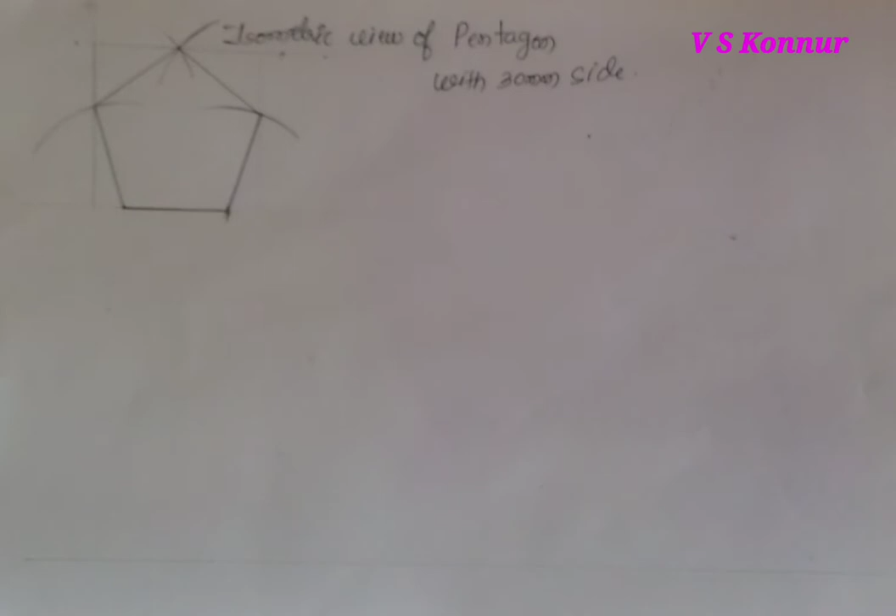So, isometric projection of a pentagon with 30 mm side. First, to draw the isometric projection of the pentagon, we have to draw the pentagon as usual with 30 mm side. First we have to draw this with 30 mm side, and then we should make the box.

We should make the box of the pentagon by considering the edge. It should be extended on either side, and also from this point it should be extended on either side, and the same will be transferred here, and it is also extended on either side. Then the same length, whatever you have taken here parallel to this, we have to transfer at this place also, the last end point. This is the first part we have to do.

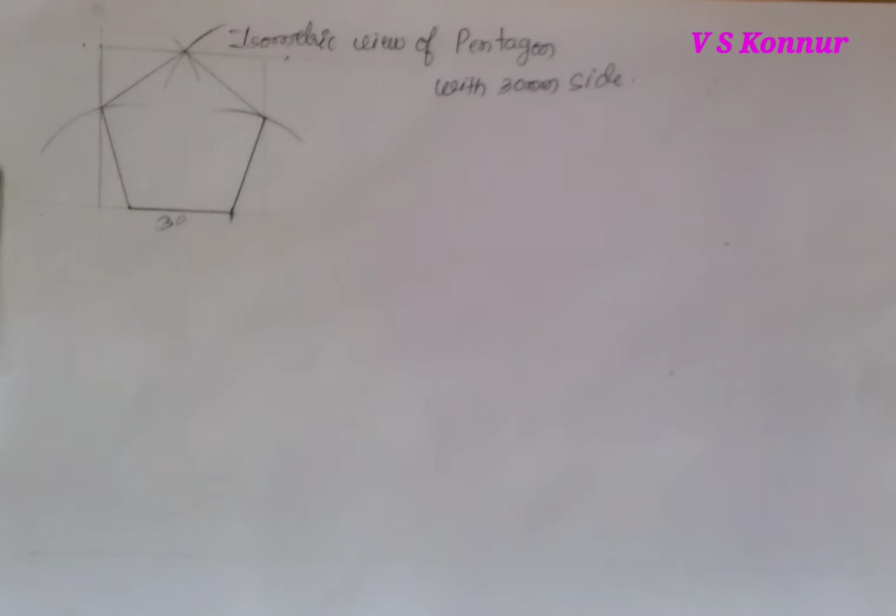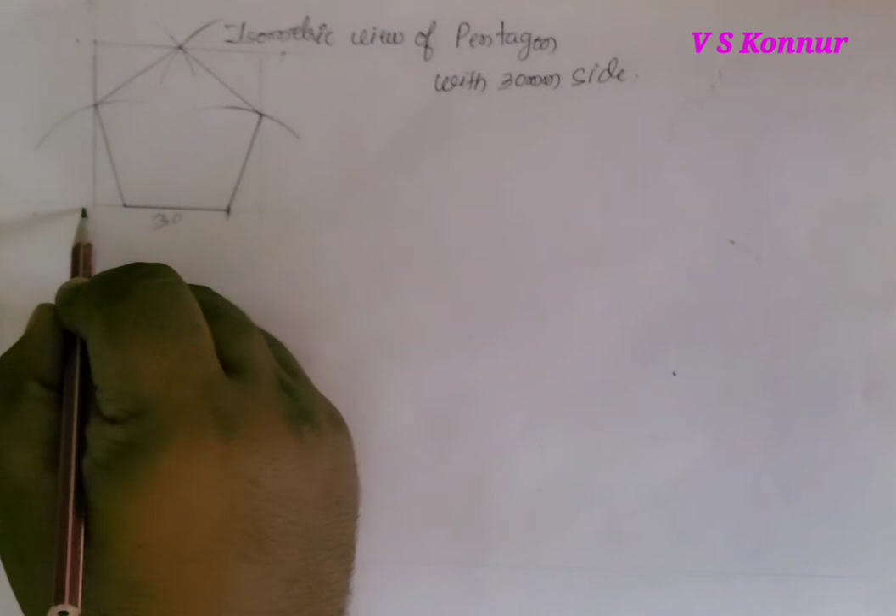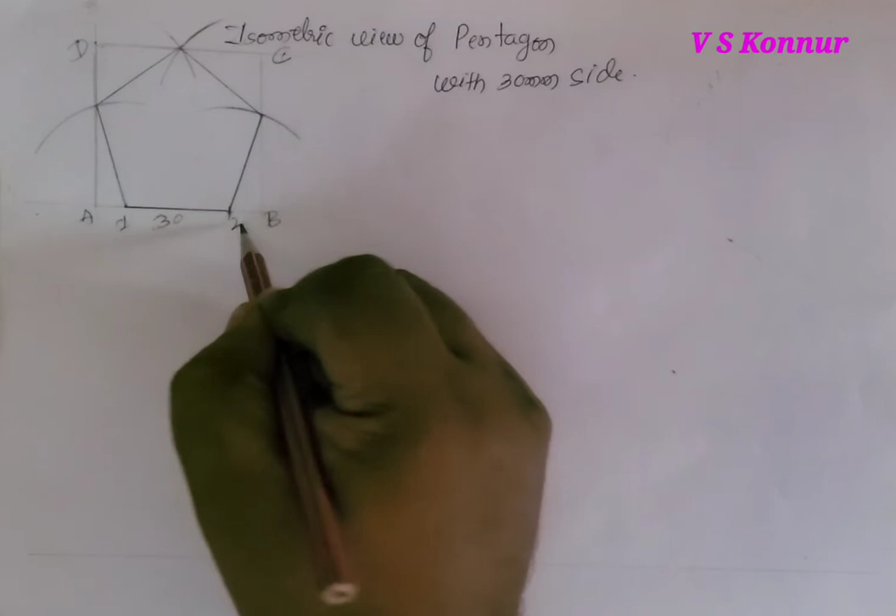Normally we have to draw the pentagon. After drawing the pentagon, we have to make the box by considering the bottom edge corners. So for that I will name this corner A, this corner B, this corner C, this corner D, and then we'll give 1, 2, 3, 4, 5. There will be 5 corners in the pentagon, so I will give them 5 names, 1 to 5. For the box I am giving A, B, C, D for convenience of constructing the pentagon in isometric view.

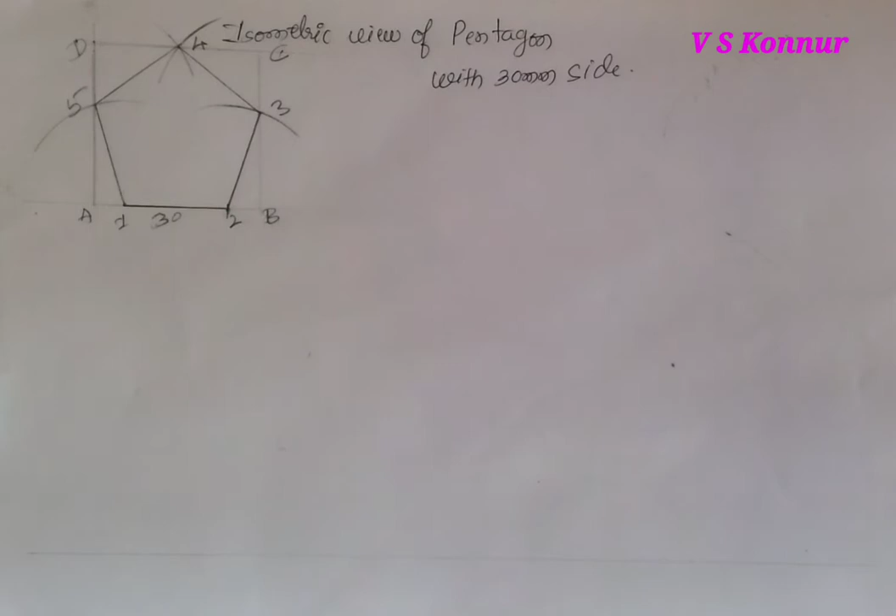Now you have to draw one horizontal line. After drawing the horizontal line, mark a point and then take 30 degrees on either side of this point on the horizontal line. Consider the horizontal as a reference after marking a point. So you have to take 30 degrees on either side.

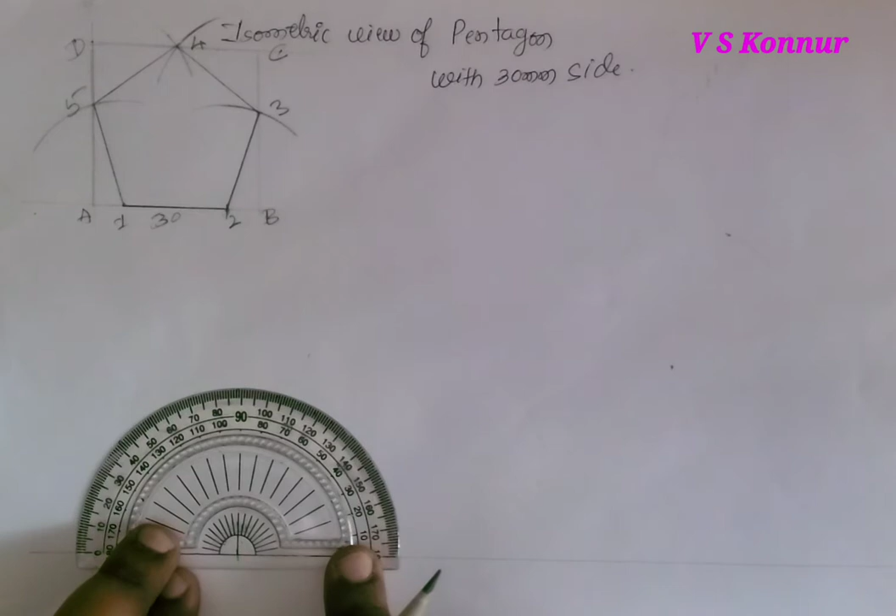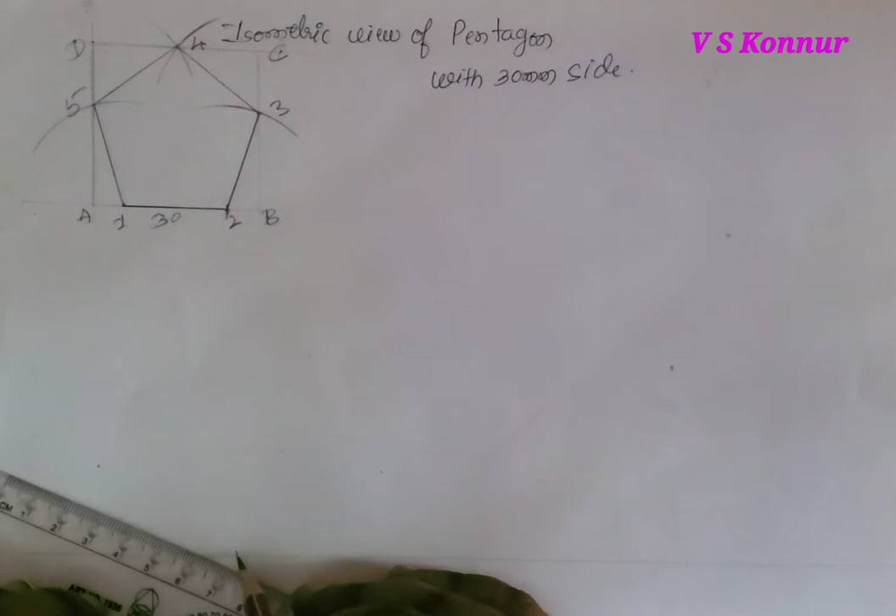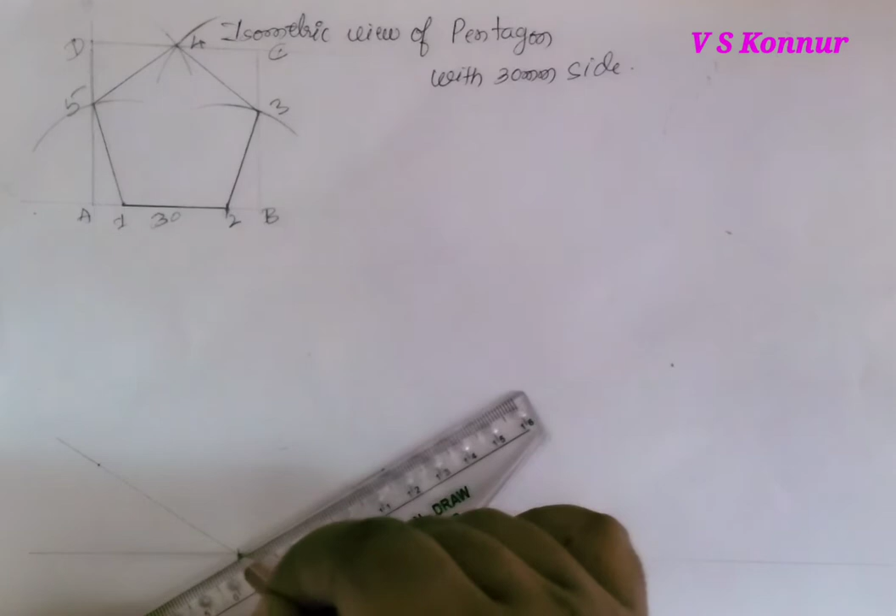After taking 30 degrees, just extend from this point for the 30 degree line. Don't make it with length. Just extend from this point at 30 degrees, and then from this point the other 30 degree line. After extending, now we will consider this point as A.

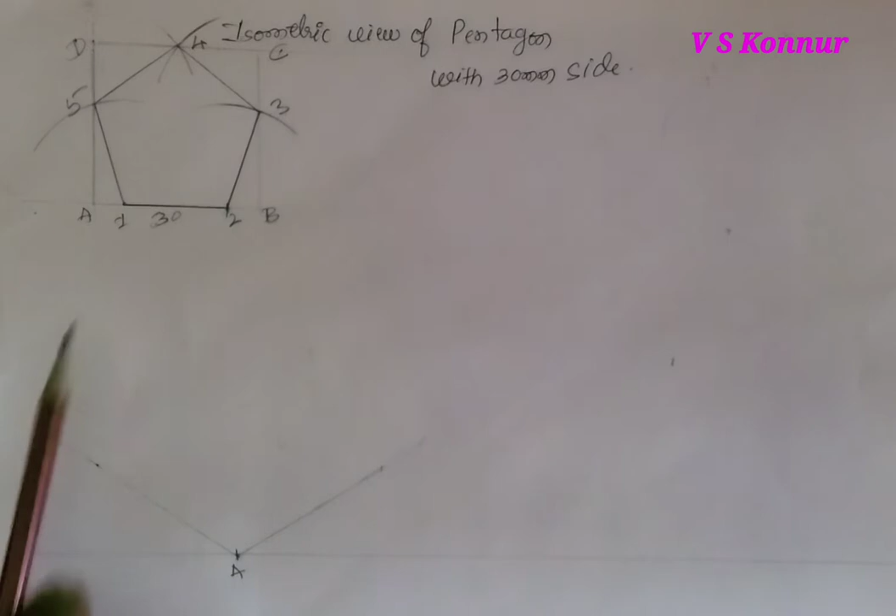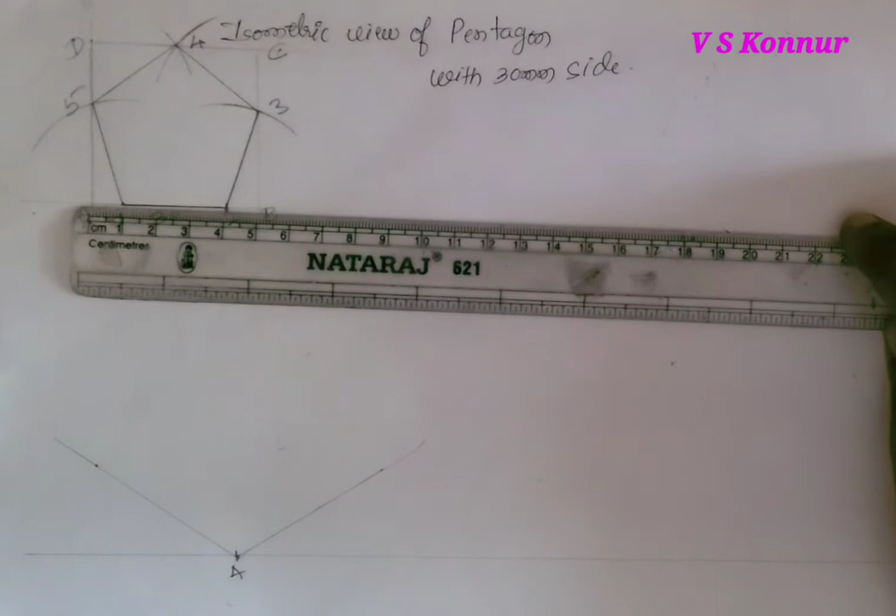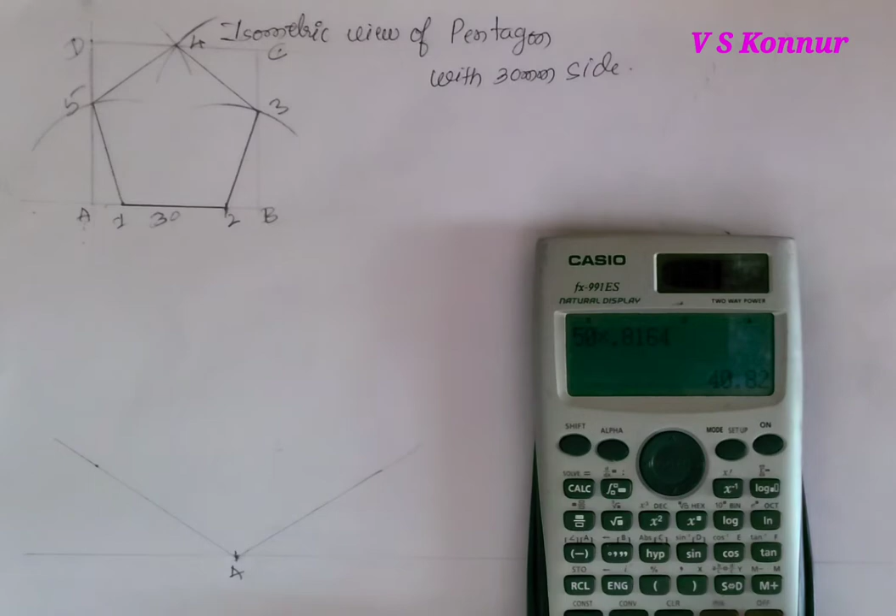This is nothing but the point I have marked here, and then I will take the distance by scale, the total distance of the box from A to B. So A to B is 50 millimeters. That 50 mm will be converted into isometric scale, that is 50 multiplied by 0.8164. We'll get 40.82, which is about 41. So AB is equal to 50 millimeters in original scale, converted into isometric scale by multiplying 50 by 0.8164.

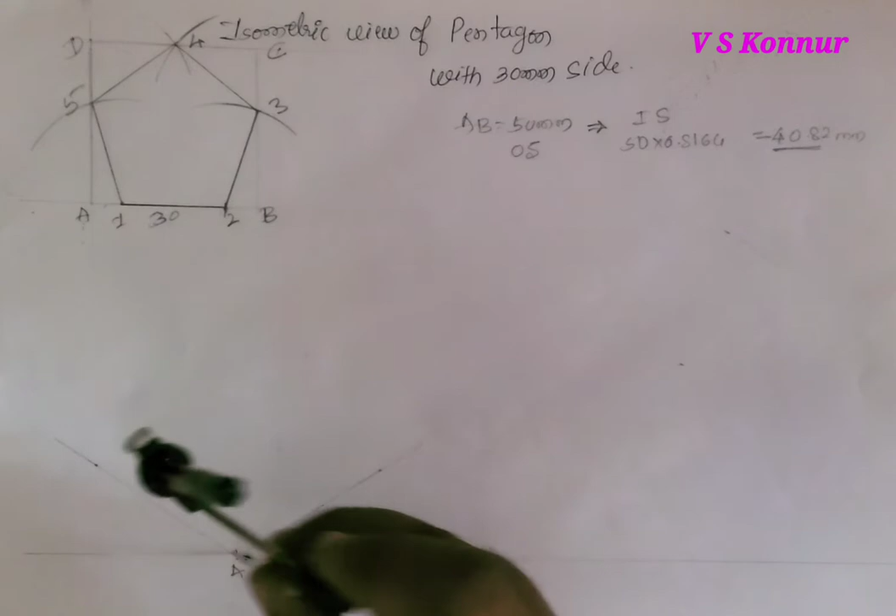So we will get 40.82 millimeters. This length will be taken with the divider and cut on this line. So we have to take 41 mm with the divider. From A you have to cut on the left side, 41.

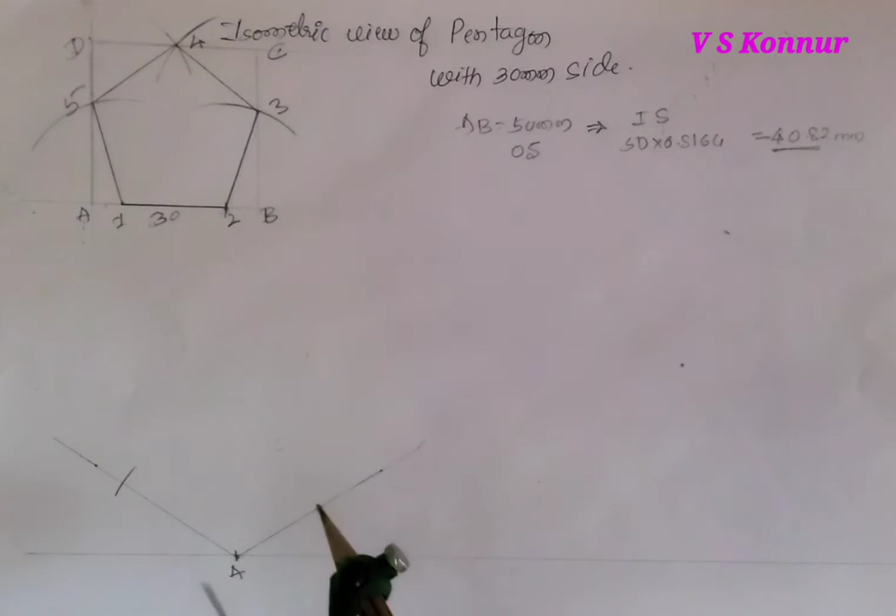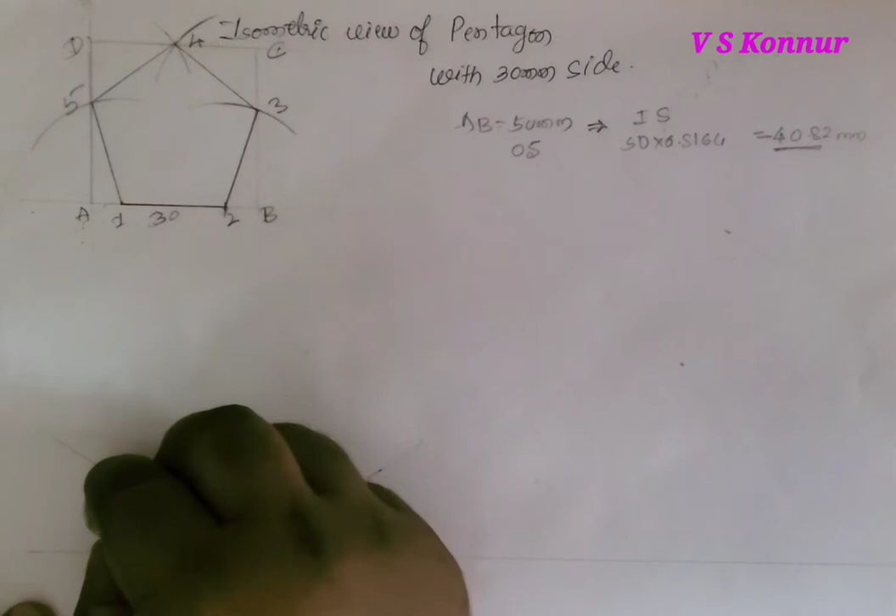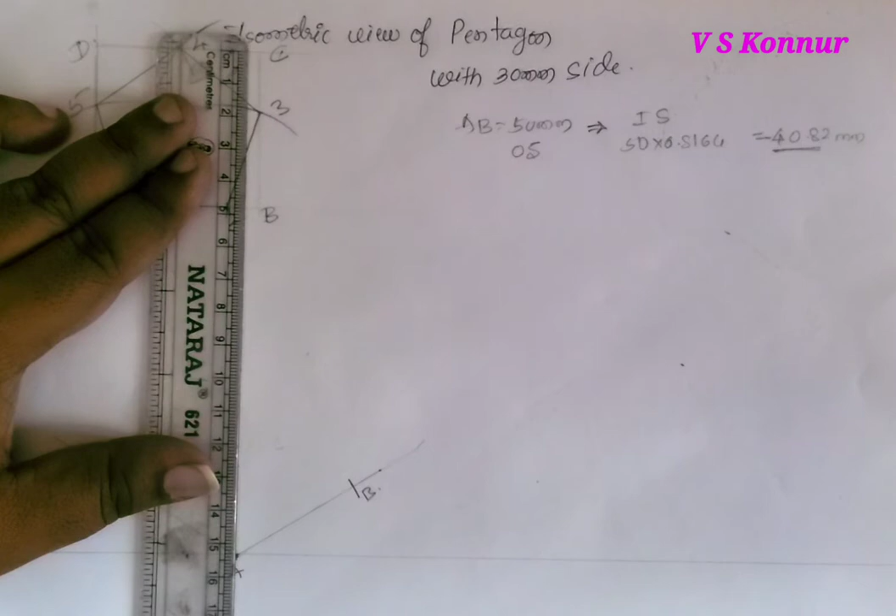And then the other side length you have to measure. A to B we have taken, so we'll cut on the right side. So this is the B point, not this point. Then we have to measure this length. It is around 48. You can measure on either side, you will get the same. It is around 48 millimeters.

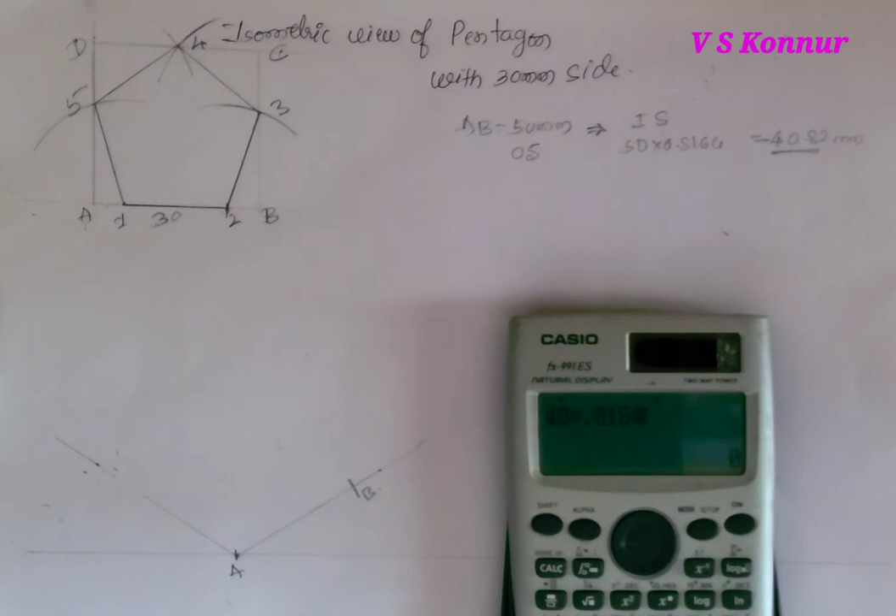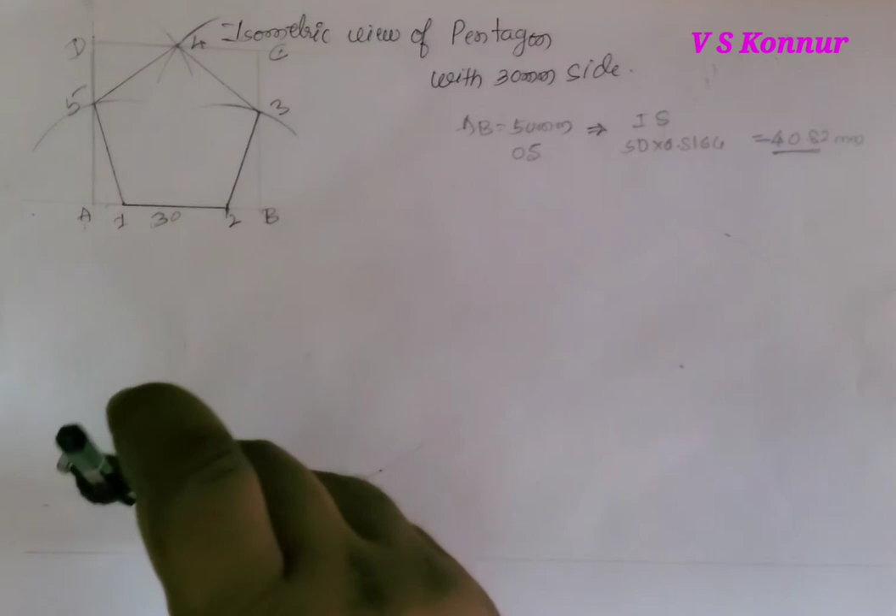So that 48 is multiplied by 0.8164, and we will get 39.18, around 39. From the scale we have to take 39, and then from A we have to cut on the left side. So here we will get the D point.

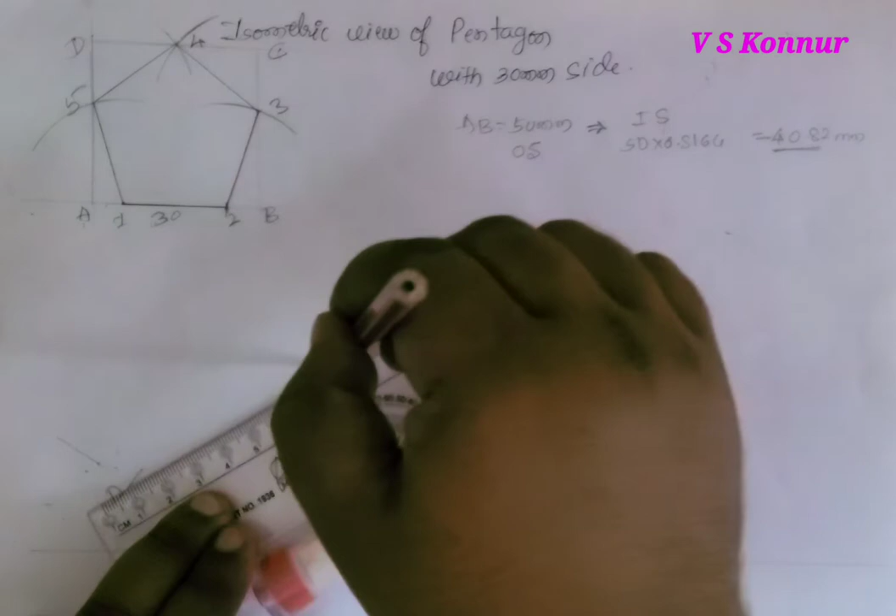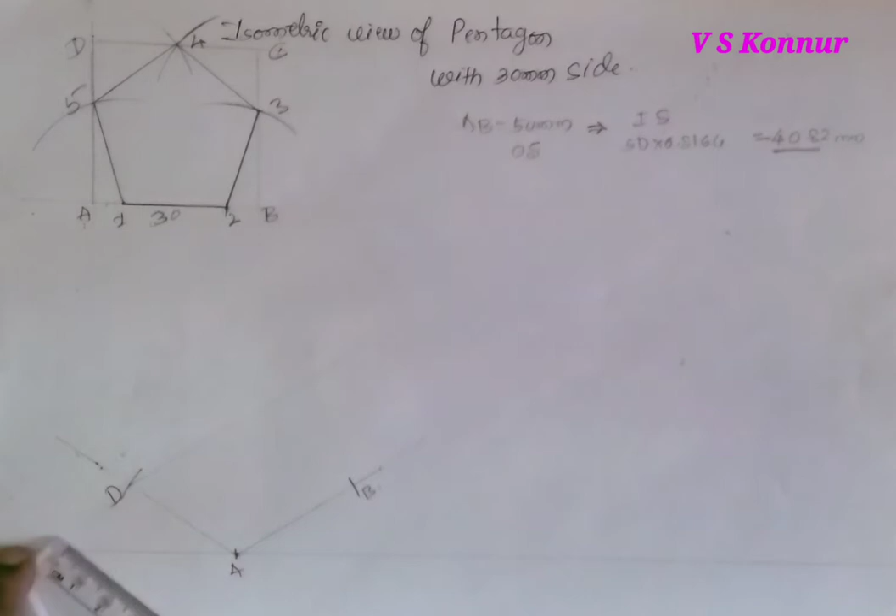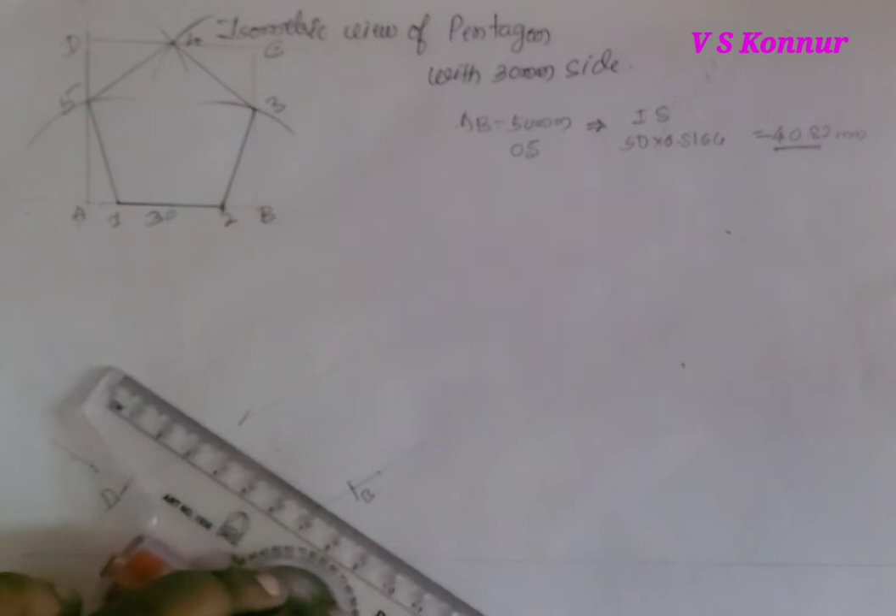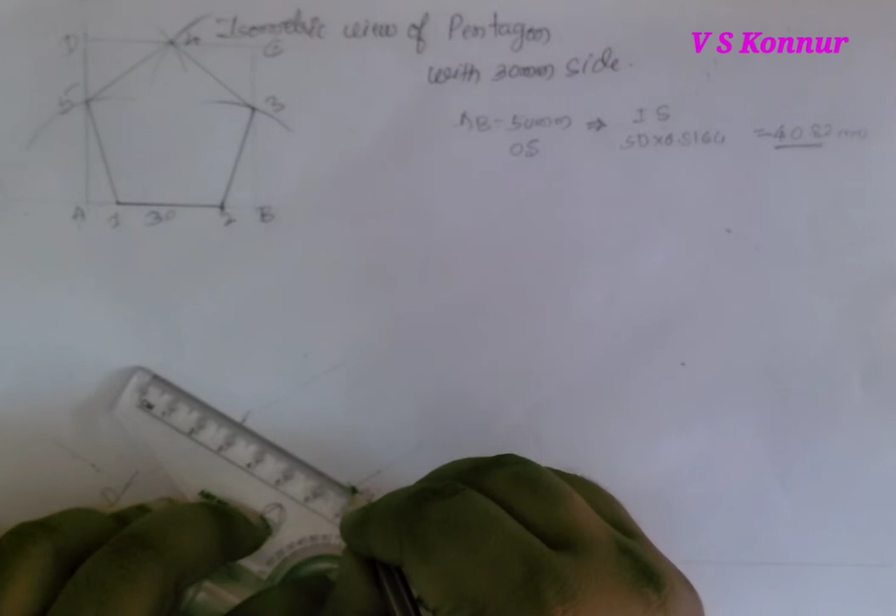The next part is very easy, no need of any cut. Just draw parallel to this line and move till the D intersection. Then from D, wherever the 30-degree line intersected, draw a parallel line. Once again, from this, extend till B, or you can cut it, since we already have the distance. From B also you can cut. Wherever it cuts, just join those 2 points. So we got all 4 points.

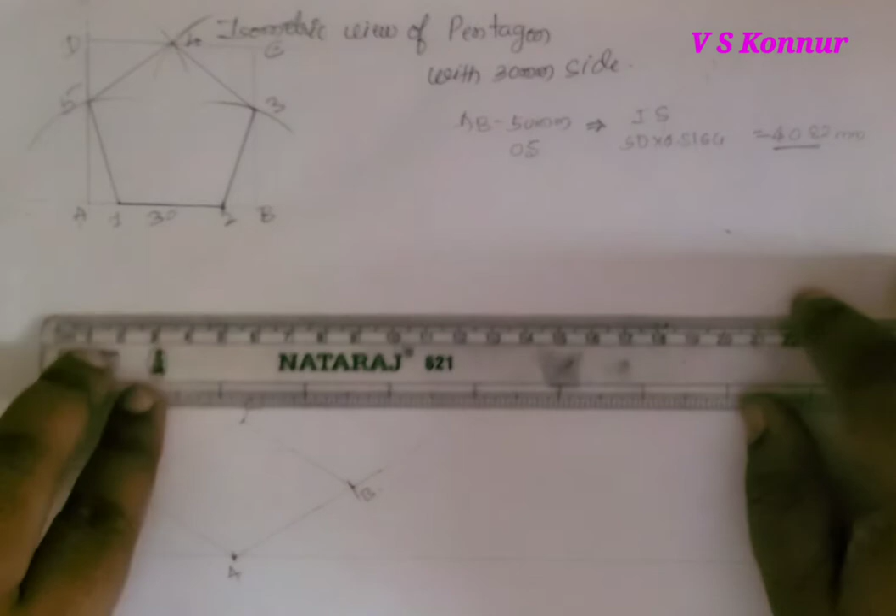Now the next part is to mark 1, 2, 3, 4, 5 on the box. First you can measure the distance from A to 1. A to 1 is 10 millimeters. From B to 2 is also 10 millimeters. So from A and B it is 10 mm. 10 mm converted into isometric scale will be 8.164, but we'll check: 10 into 0.8164 gives 8.164.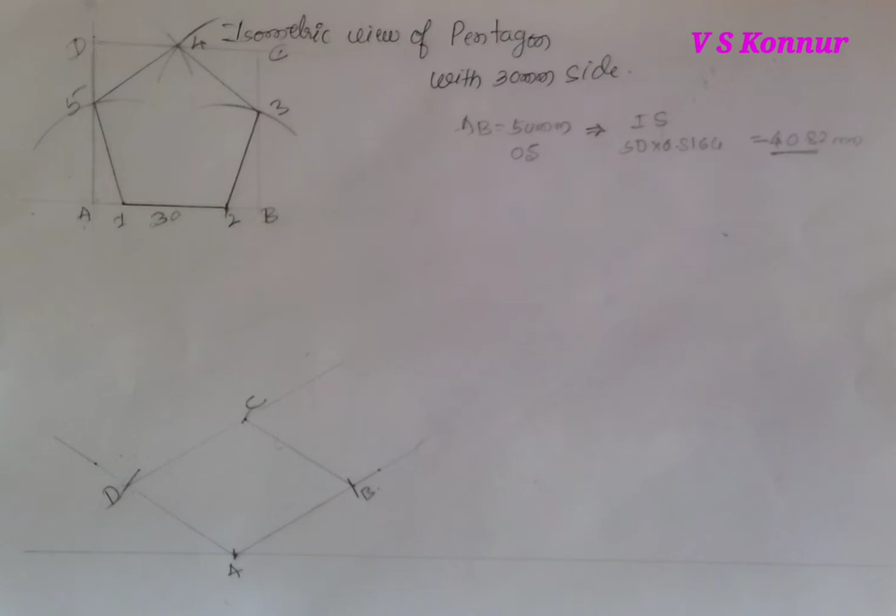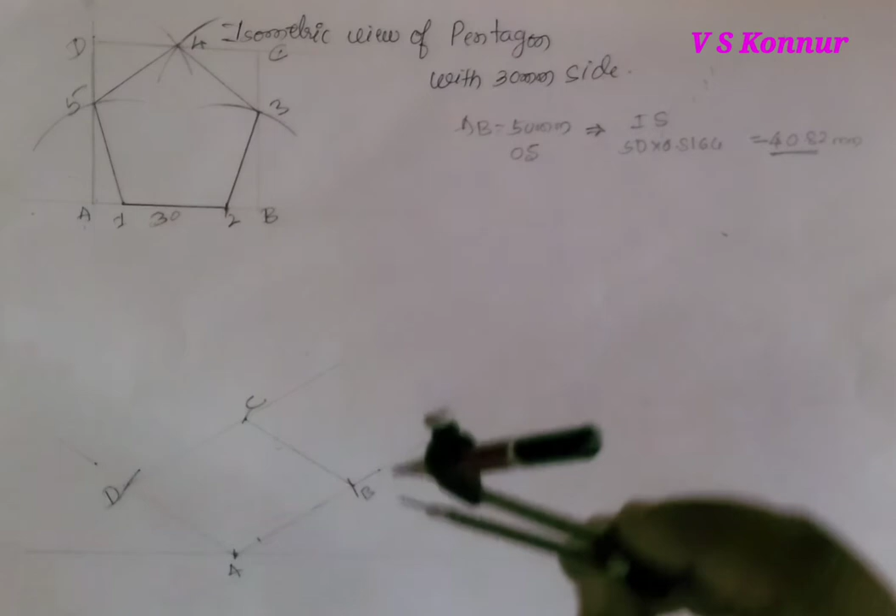From the divider you have to take 8.164. It is not possible, so take in between; take 8 millimeters. Keeping it at point A, 1 is in between A and B. Keeping it at point B, 2 is in between A and B. From B you have to draw. So we got the first and second points here.

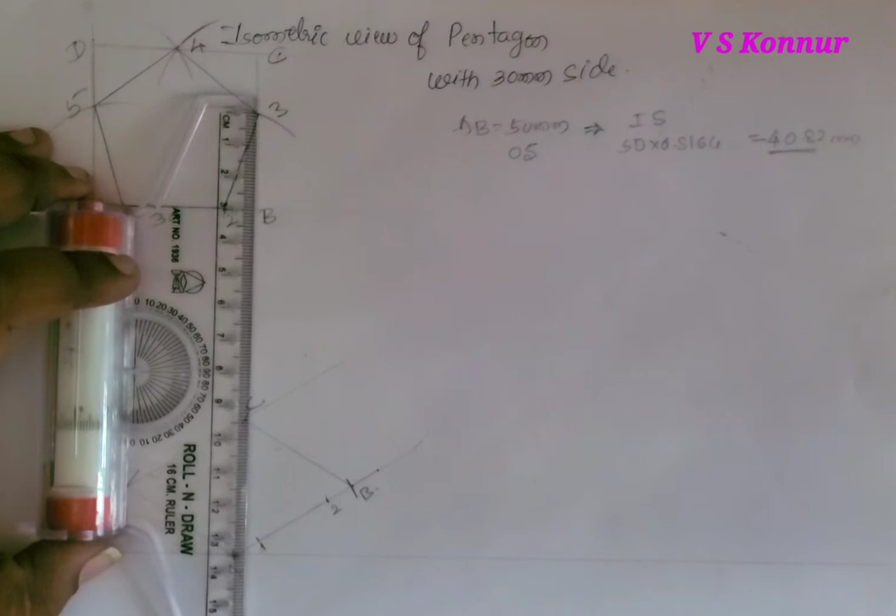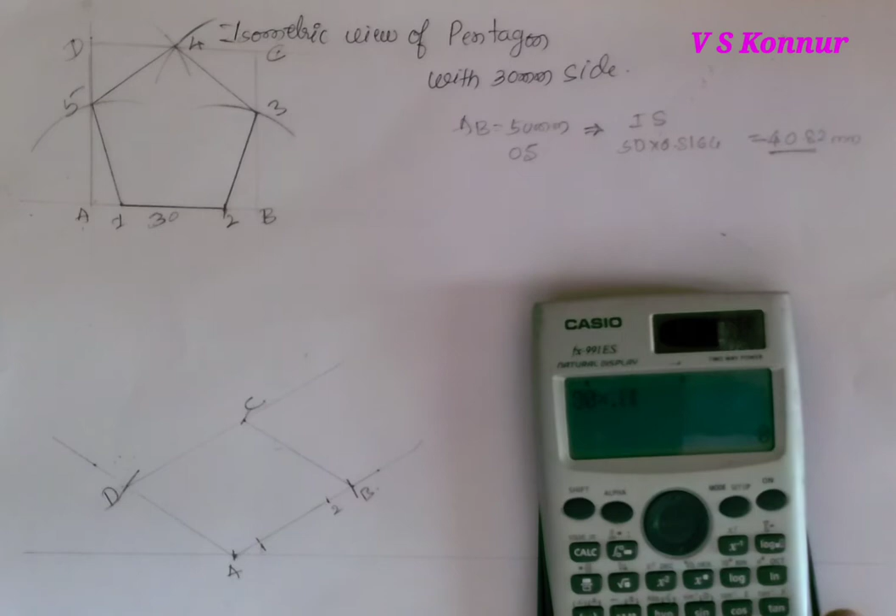Then you have to measure the length from the third point to B. It is 30. That 30 is converted into isometric scale by multiplying by 0.8164. So we'll get 24.49. You have to take between 24 and 25.

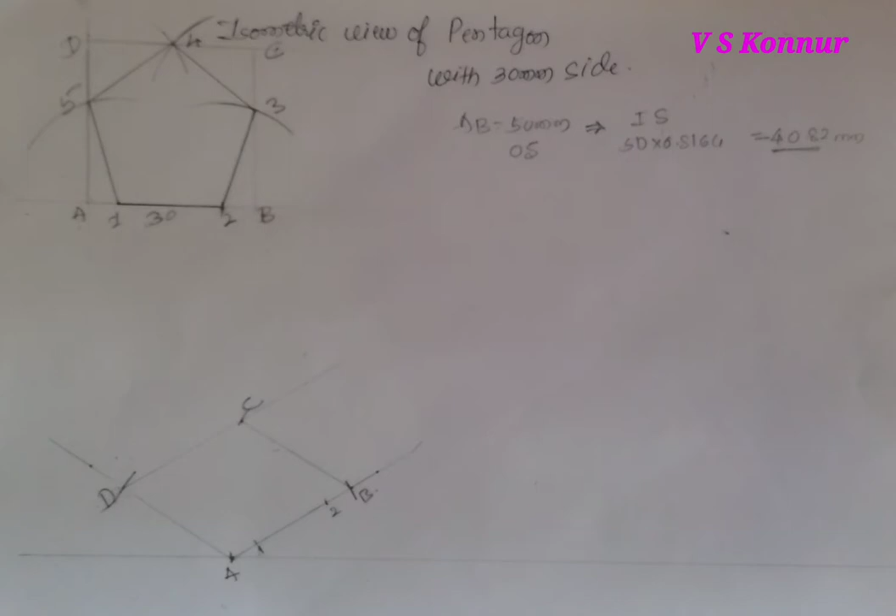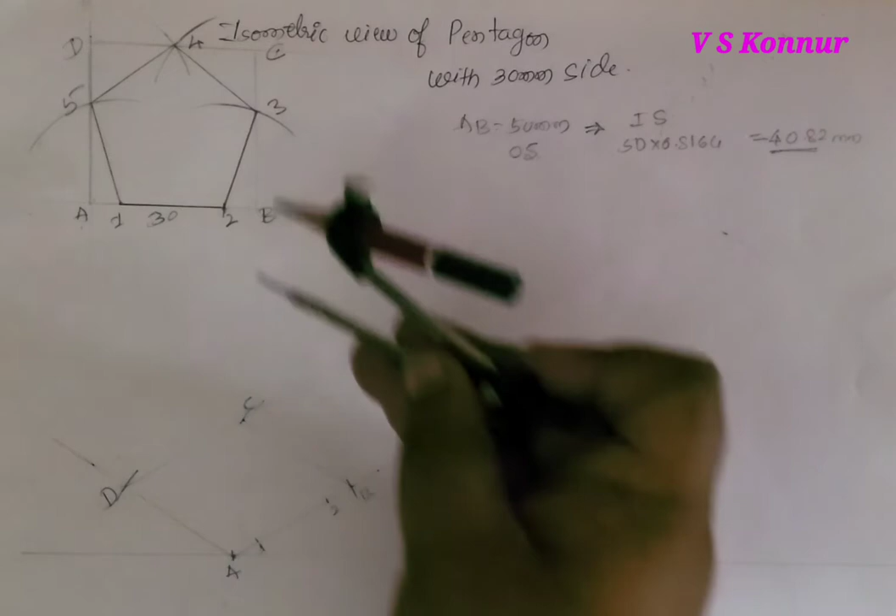By keeping at B point, because from B you have taken the distance, by keeping at B point, cut the distance. So you will get the third point. The same way, this distance is also the same, fifth. So by keeping at A point, we'll cut this side. So here we'll get the fifth point.

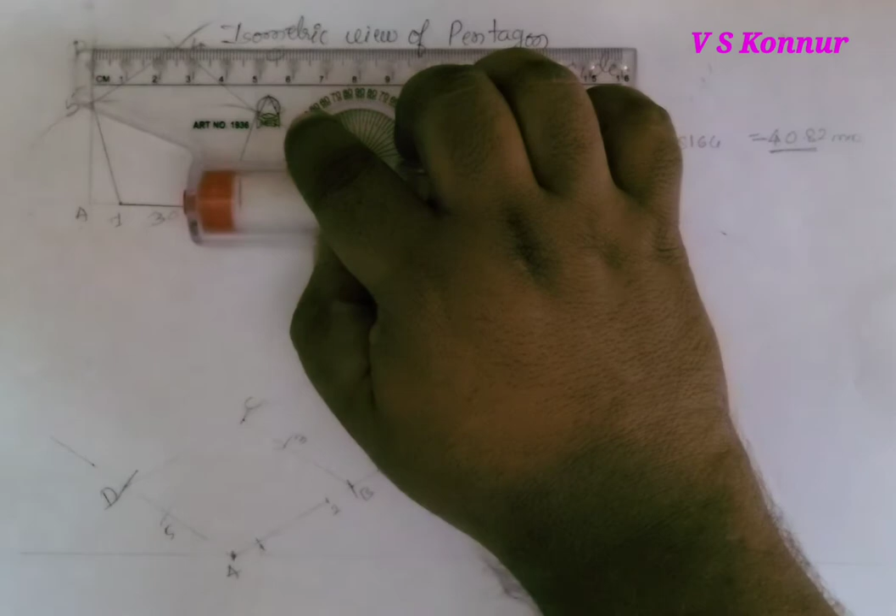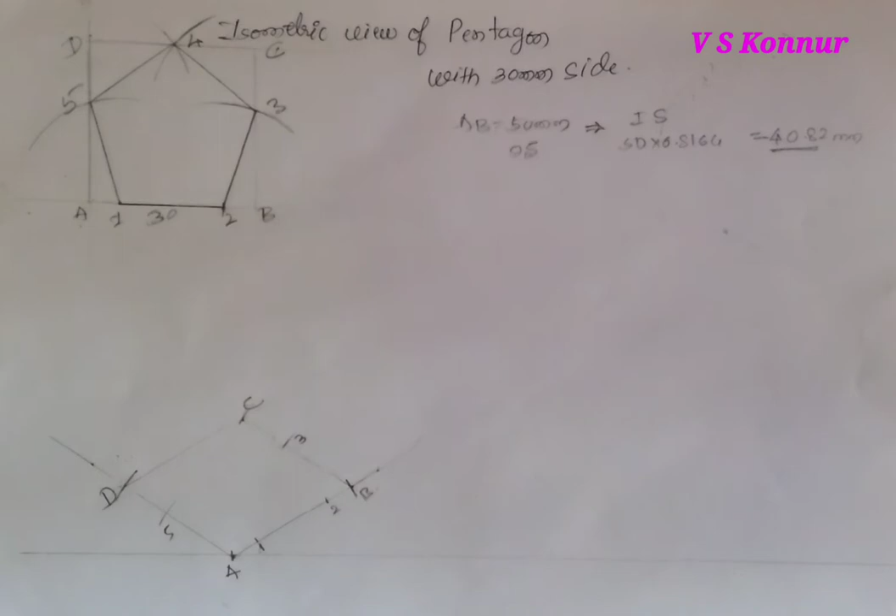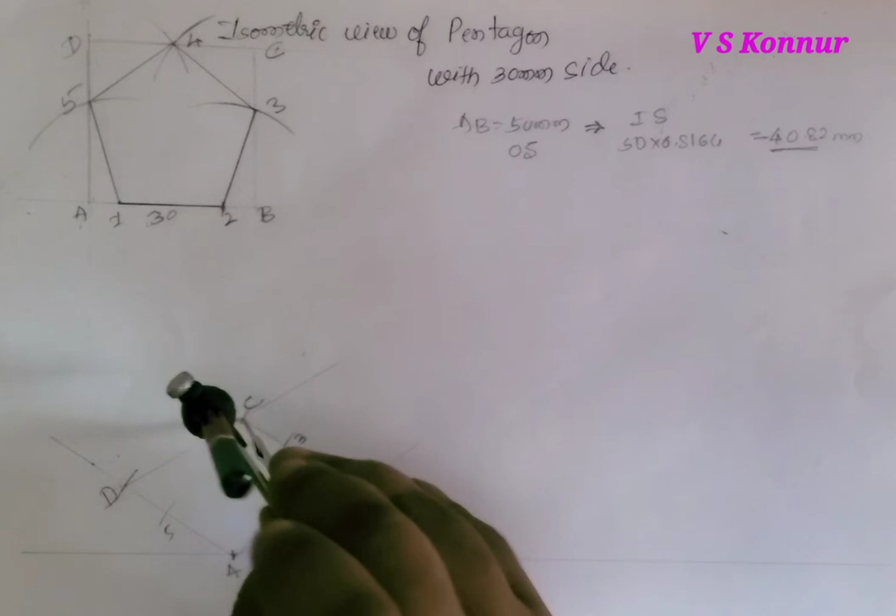Then you have to measure the distance D to 4. So it is around 25. 25 is converted into scale. So we'll get 20.41; in between 20 and 21 you have to take. By keeping it at C point, because from C to this distance or D to this distance are the same, cut in between C and D, you will get the fourth point.

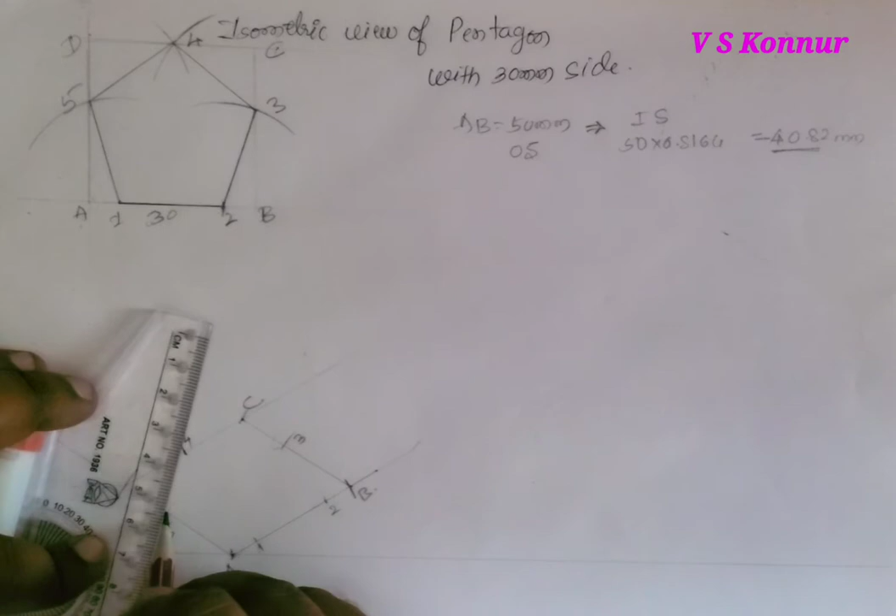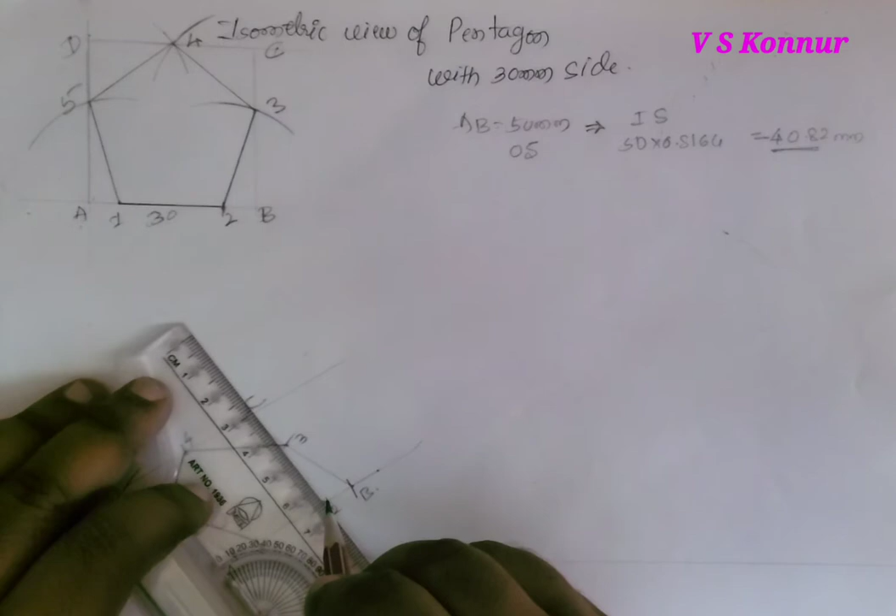Now join all the points 1 to 2, 2 to 3, 3 to 4, 4 to 5. Now I join 4 to 5, and then we'll join 1 to 2, 1 to 5, and then we'll join 3 to 4, and then we'll join 1 to 2, 1 to 3, 2 to 3. This is one.

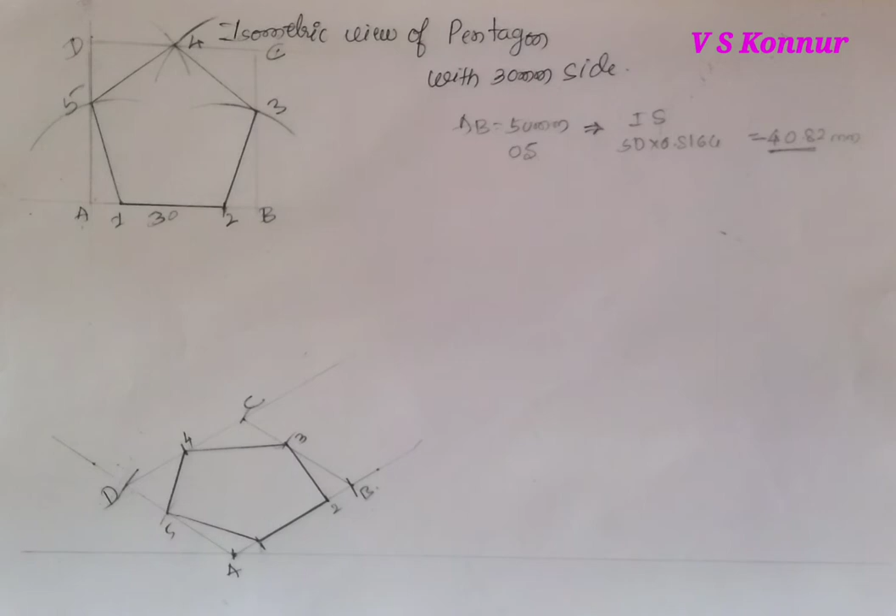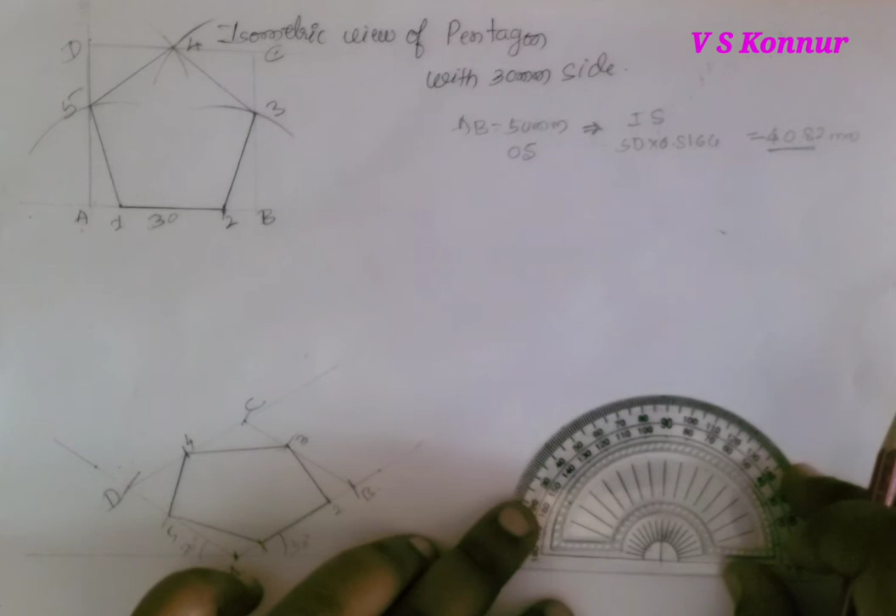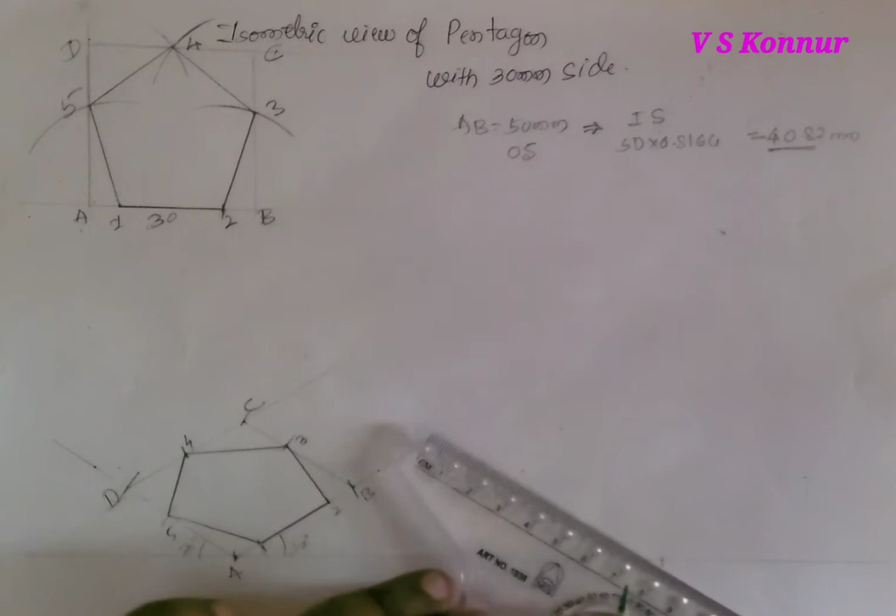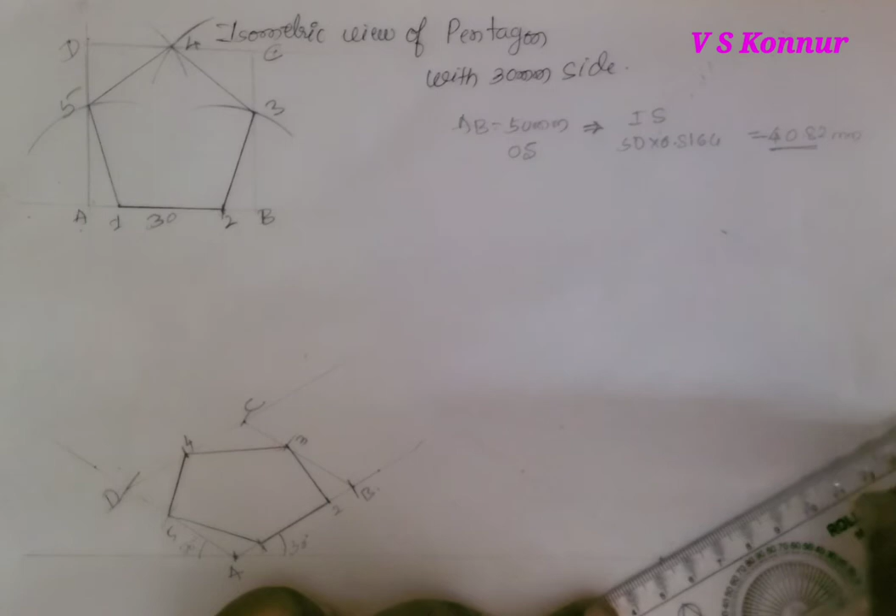Another way also you can construct. So we'll try here. We'll show that also. Now we have to mark a point, and then you have to take 30 degrees on either side. Then join. And then you have to join these 2 points and extend. On either side you have to extend. So these angles are 30 degrees.

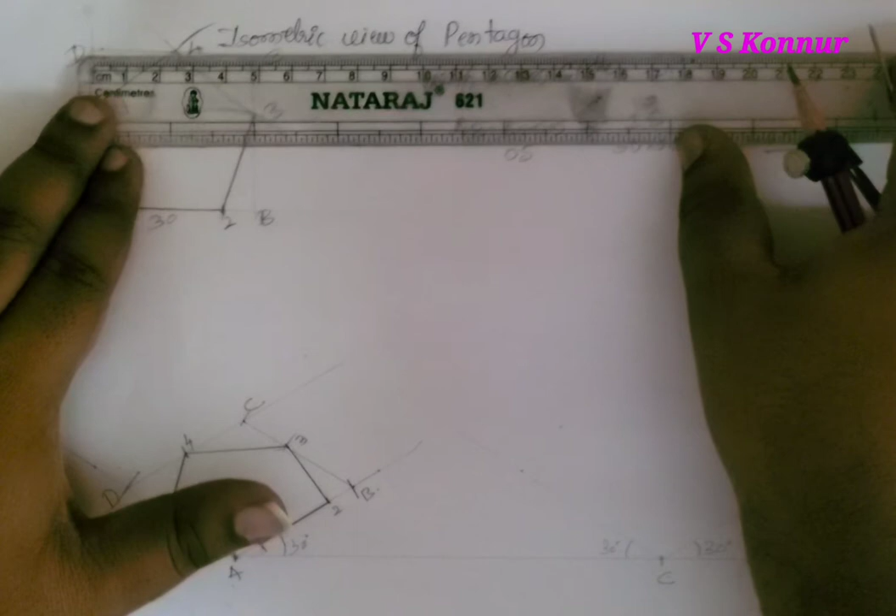Now as usual, the first distance from C I will take. The distance is nothing but C to D, or you can take A to B, both are the same. 50 millimeters is there, already I have converted it. It is nothing but 40.82. So we'll take that distance. C to D I have taken, so D I will take this side.

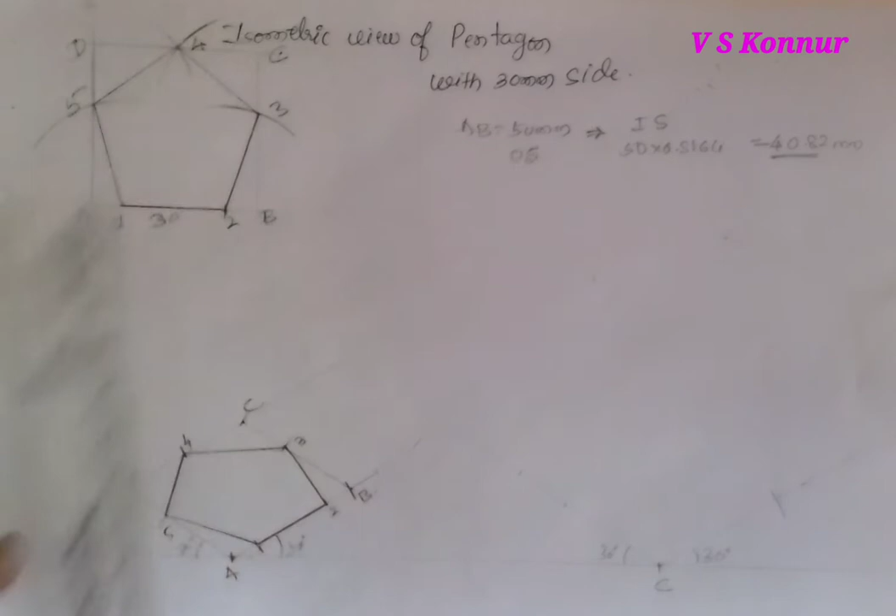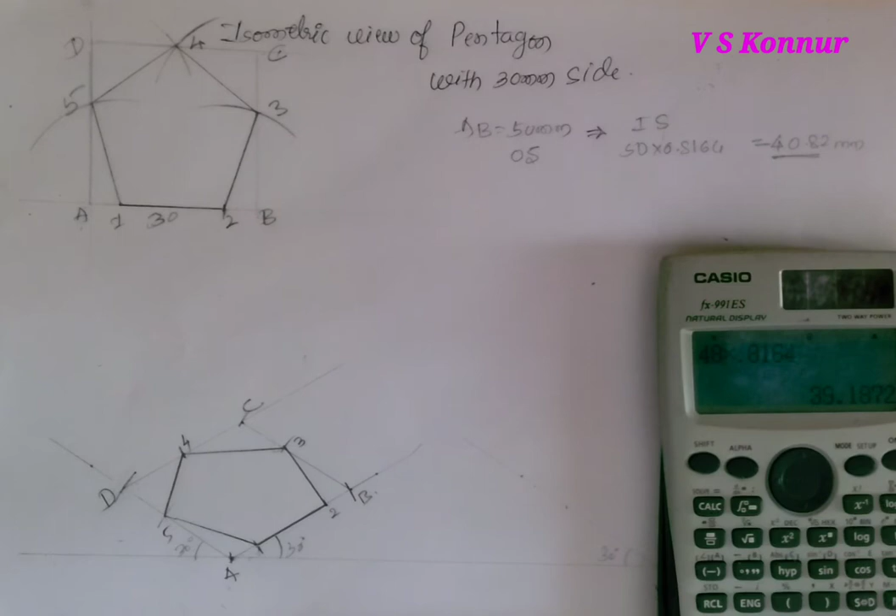And then another distance you have to measure, that is nothing but this distance. It is 48. 48 should be converted into scale. 48 multiplied by 0.8164 will get 38. Sorry, 39. So that 39 will be taken on the other side.

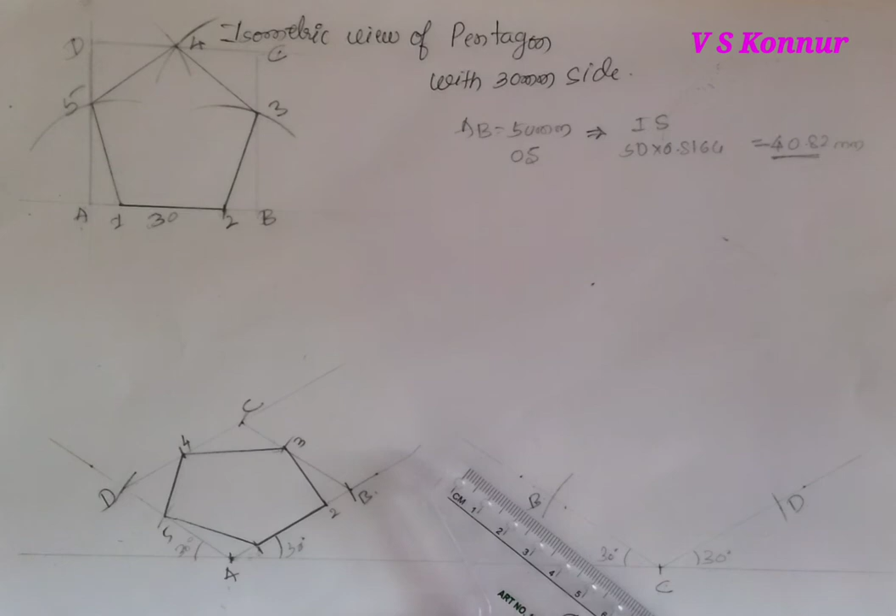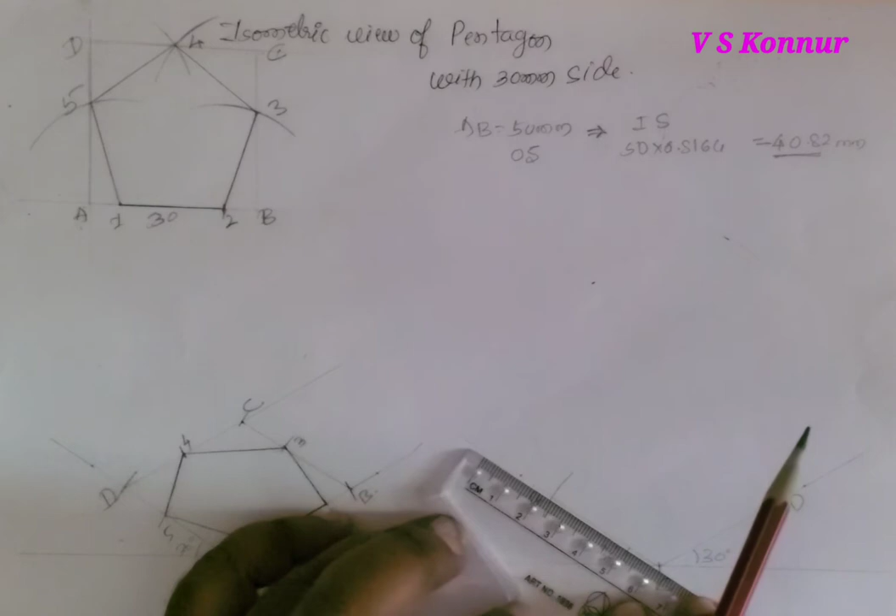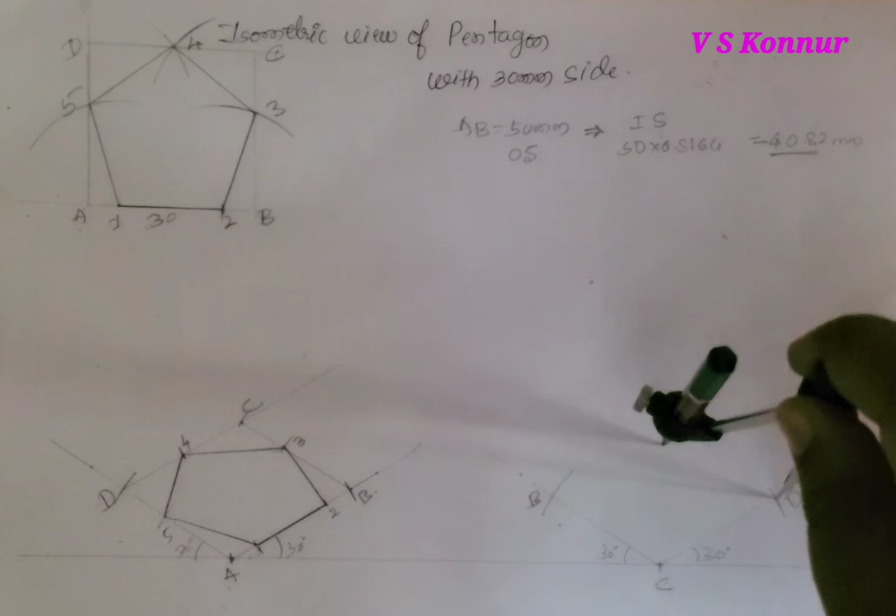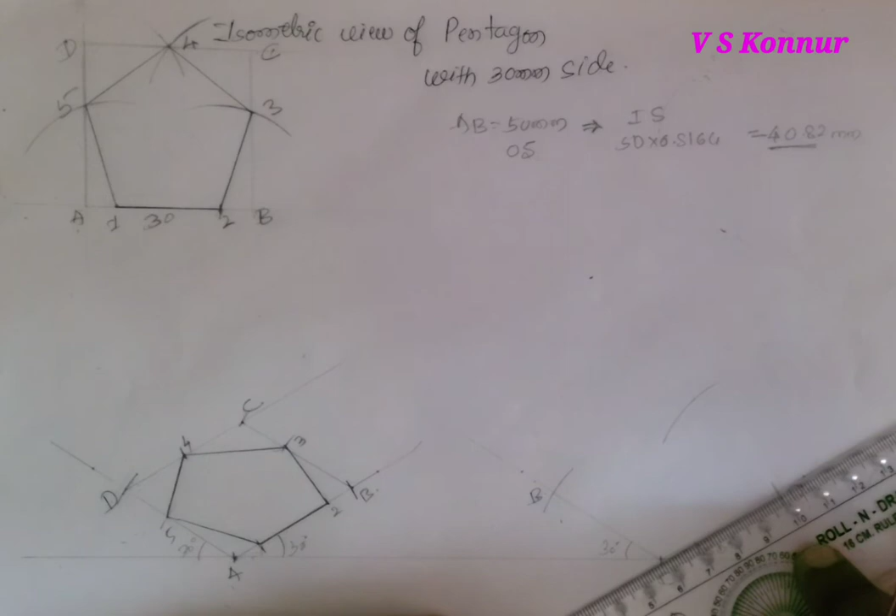This point is D, this point is B. Now as usual, by roller scale, parallel to this line, make it dark, or you can take another way: just from this point draw the arc here, and then take the parallel line from CD. Wherever it cuts, you will get A point. Then just join A and D points.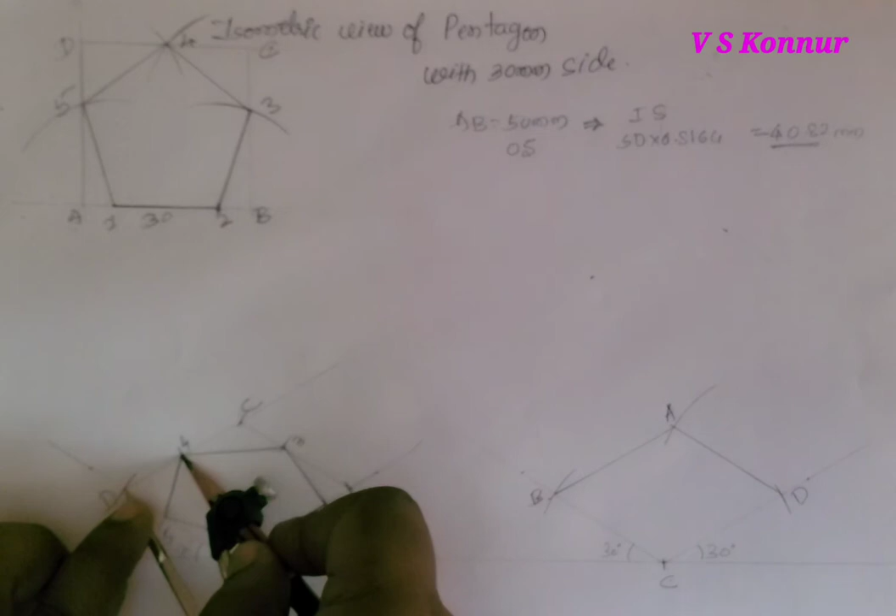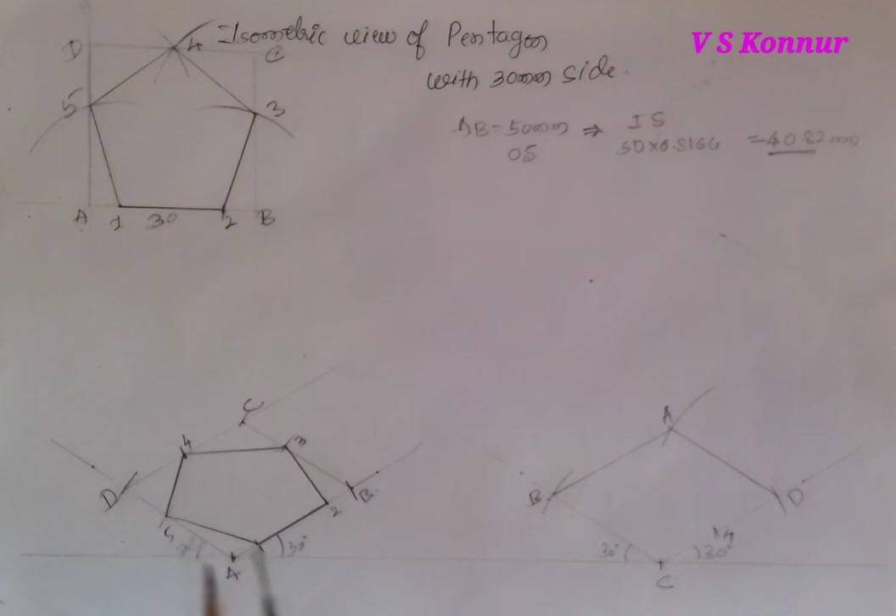So we got ABCD. Now in between C and D there is a point, so that distance we have to take. Already we have constructed here, we'll take this distance directly, so it is very easy. So this distance I will take here. So we got the fourth point directly in between C and D. Next, in between B and C there is a point, so we take the same distance because we have already converted that scale.

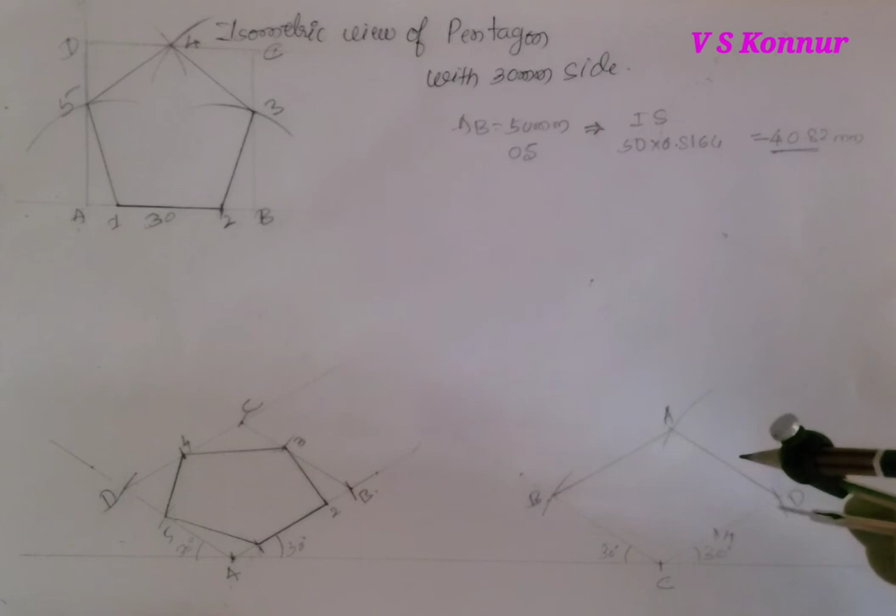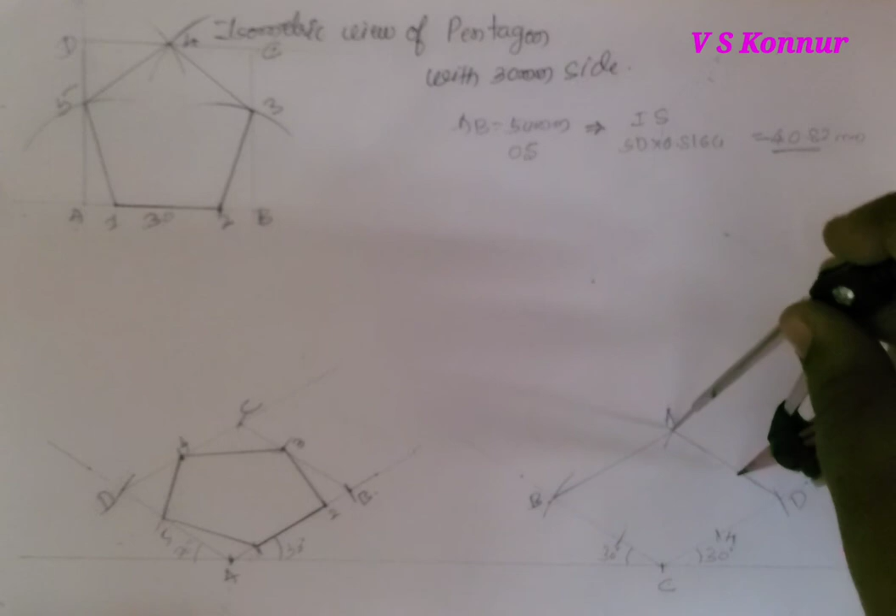So from DC, B to C, and also from A to D, and then another 2 points are there, that is nothing but A to the first point. A is here, in between A and B, A to first point, and then the same distance will be there on either side, so from B.

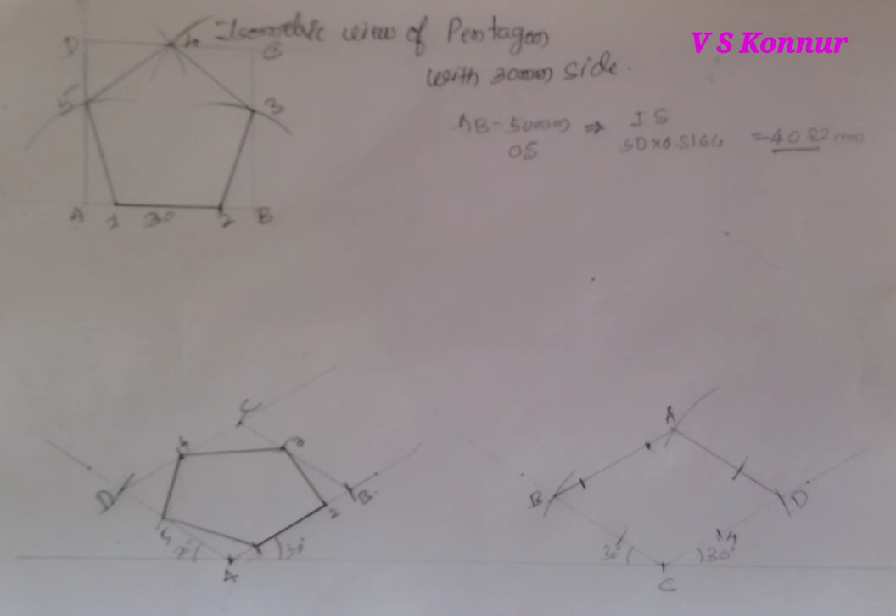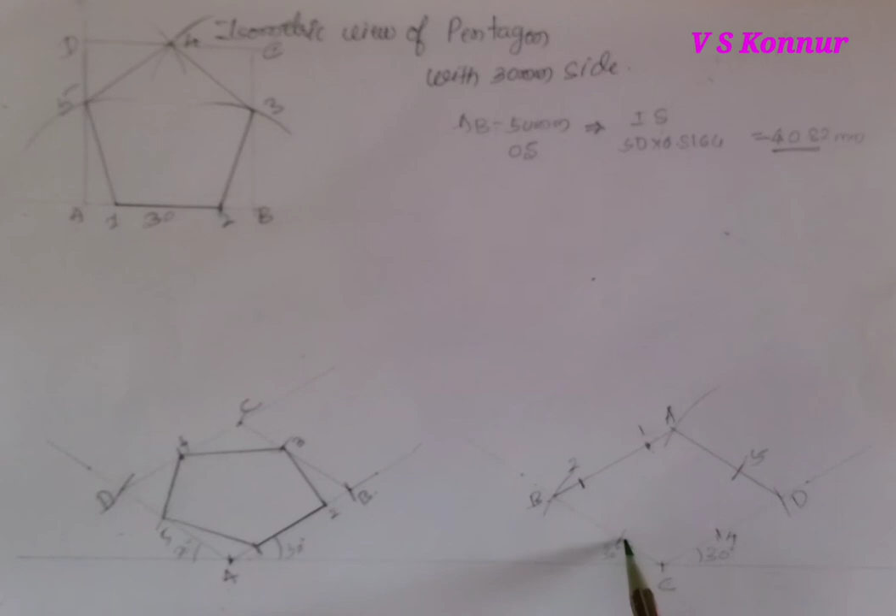Now just join all the points. So we got the fourth point here, in between C and D. You can check here, in between A and D, the fifth point is there. In between A and B, 1 and 2 are there. Then this is the third point. So we'll join all the points.

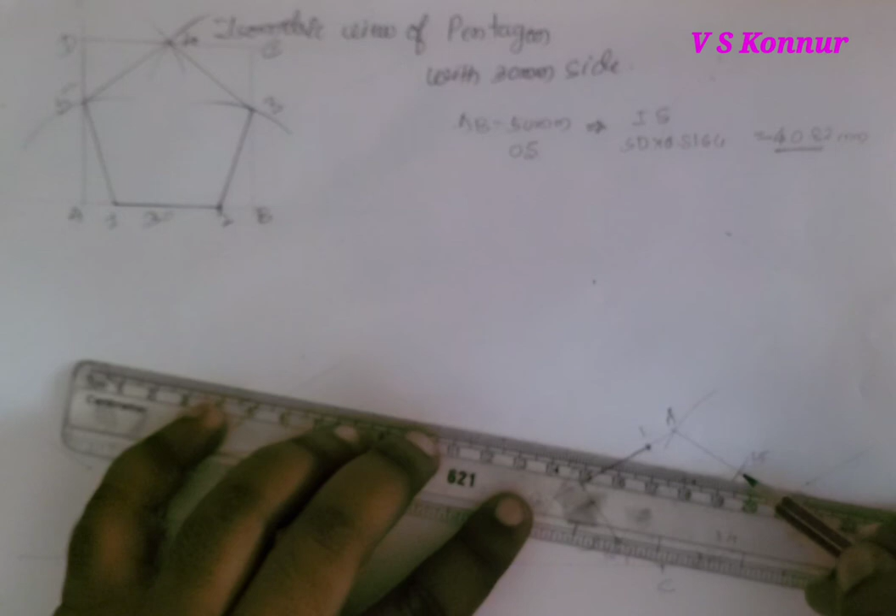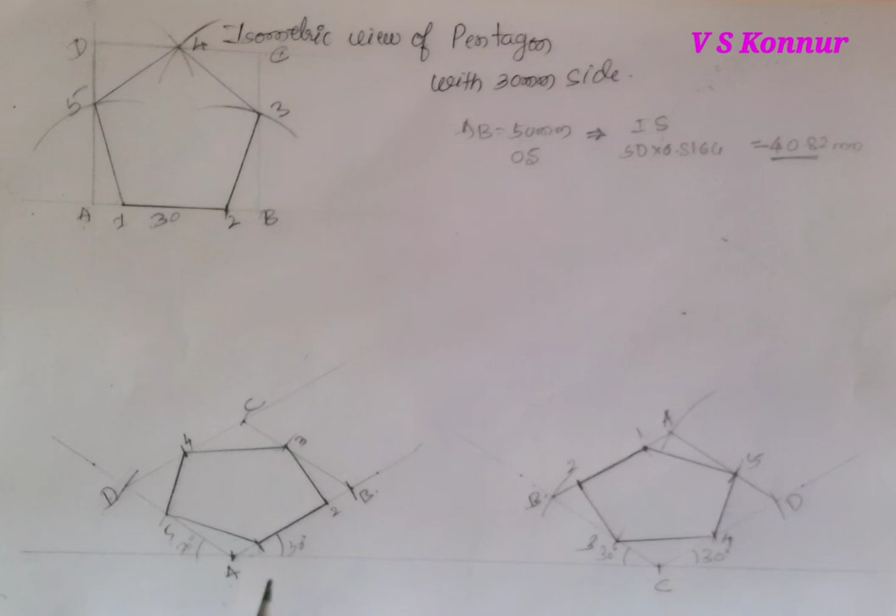So you can watch these, there's a difference. The corner comes at the right side, here it's an edge. You can construct any of the pentagon, any of the sides, by considering the original scale only.